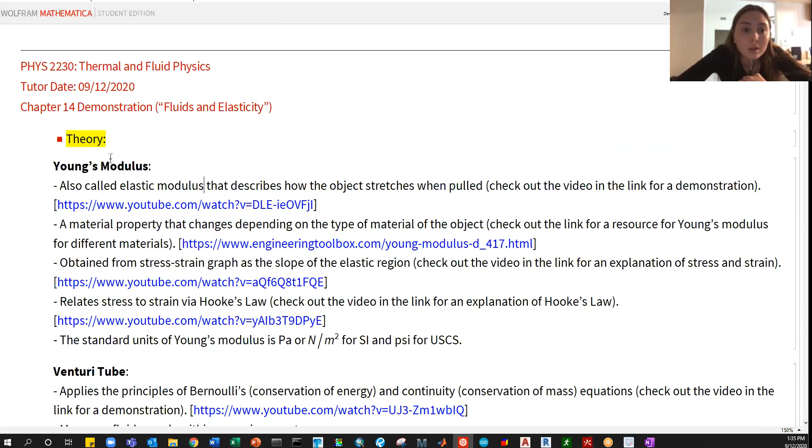But yeah, what I'm gonna try to do is with each chapter, since this is the first time, I'm gonna have some theory, and that's why I was asking which ones do you want to focus on, because there's so many, right? There's so many we can talk about, and then I think if we go over the homeworks and this example problem. Did I send you the example problem?

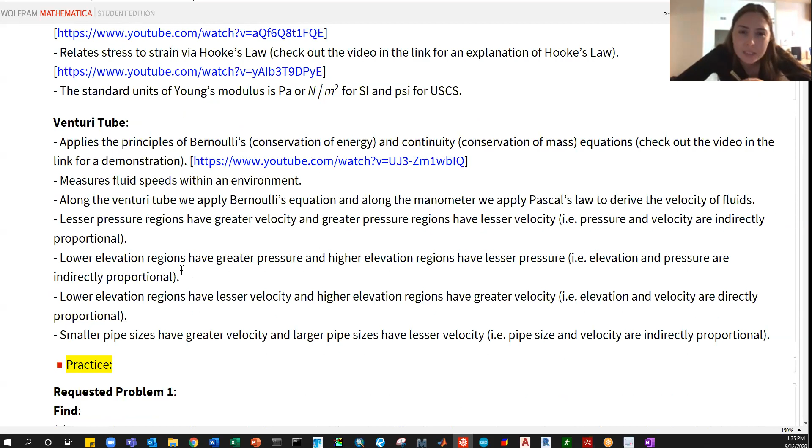Yeah, like three of them. Unless there's more, I can't remember. Hold on, it was example 14.6 something. Is it the one with the Y? Kind of like the Young's modulus? Stretching a wire, it was about stretching a wire.

Yeah, I think that's the first one. And then I'm sure the Venturi meter, like Venturi tubes, are going to be on the exam too. I was actually watching YouTube videos on Venturi meters last night, so I'm really familiar with it. But I actually have a question on that subject.

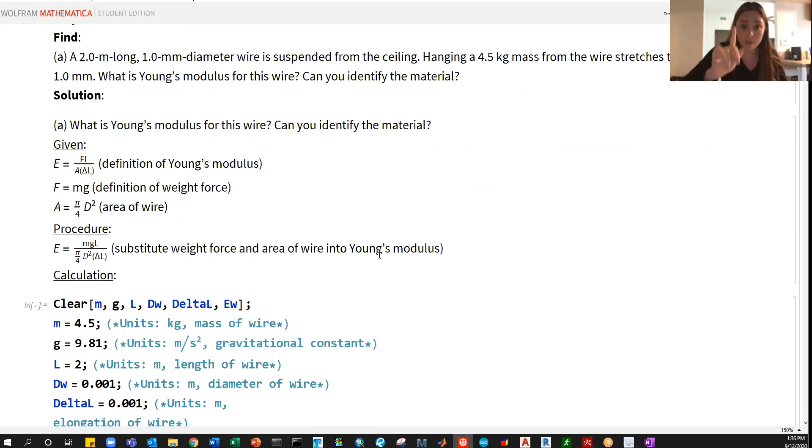So, have you heard of the chemistry tutor guy on YouTube? There's a lot of them. I do, in fact, keep track of a lot of them, like I have a library of YouTube videos. Okay, which one though? Who's the guy? It's like his name is that chemistry tutor guy. Oh, that's the name, okay.

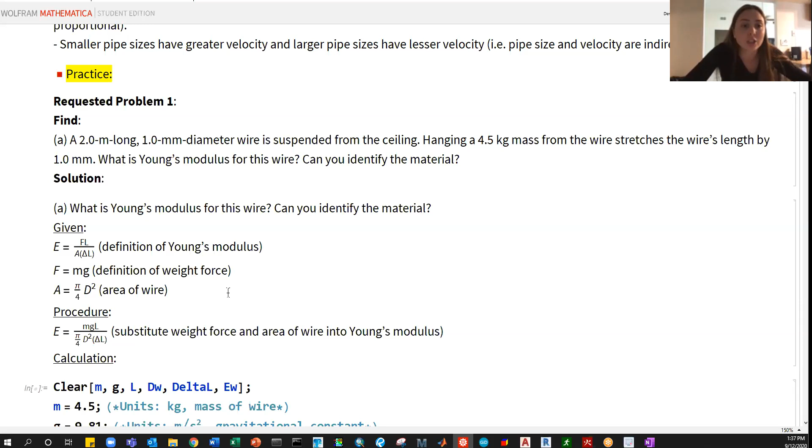Yeah, and so he was going over the Venturi tube, but I was confused on how he explained it. Watch here, I'll show you, I'm gonna share my screen. Okay, go ahead, let me stop this first. Go ahead, all right, one second.

Oh, I saw this one. Yeah, but I wasn't gonna add this because it seemed like there's a lot to it and it's kind of boring. But anyways, what about it? I was understanding it up until, well, I mean, I guess I still understand it. It was just more of a curiosity question more than anything.

Okay, go ahead, let me make this bigger. So pretty much this problem—hold on, I'm gonna minimize this. Okay, so this problem gives a point A and a point B, right? Yeah, and it has two water levels, and the distance between the two water levels is 61.2 centimeters. Yeah, and then so we're using Bernoulli's equation.

Is that the reason why we're using it? See, like I don't know, when I'm looking at a problem, I don't know if I'm going to use Bernoulli's equation or just use the continuity equation. I don't know. I see what you're saying.

So this is like the whole concept of Venturi tubes or the Venturi effect. We'll probably go over it, but since we're talking about it now, this equation right here at the bottom is in fact Bernoulli's equation. This is the general one, and I think this is the energy one because there's also the head version. So what you do here is think about the height—like which one do you use? Either the A1V1 equals A2V2.

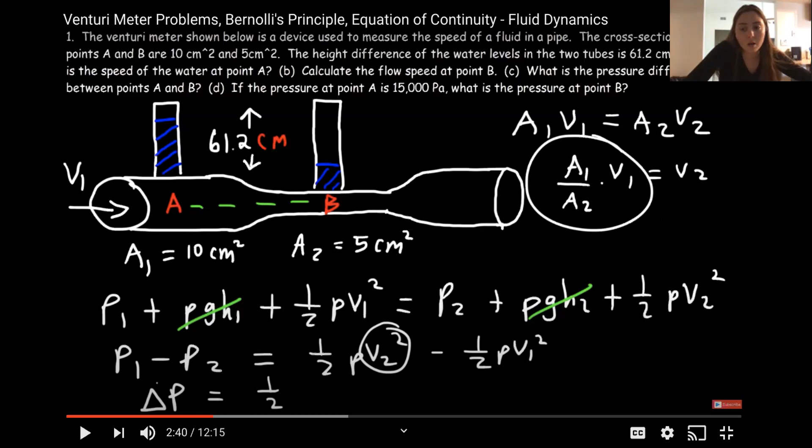And then where you have these water level heights up top, we technically call that a manometer. And you know the equation, this delta P at the bottom, P1 minus P2? So this P1 minus P2, every time you see this difference in pressure, that's Pascal's law. But this is where the top part, the manometer, the difference in heights, this is where you apply that, the difference in heights of the water column. That's the only time you apply that. So these differences in heights of the water correspond to pressure. Yeah, that's where you apply it.

Like how you combine these is because that's the height, that height right at 61.2. Because you're gonna have a height for P1 minus P2, you're gonna have a different height from H1 and H2, right? This H1 and H2 is not the same height for the column of water. Exactly, this H1 and H2 really is A and B. That's why I don't like how they're labeling it, it's actually A and B. That's why they cancel out, because they're at the same level.

So my real question, the main question I had was, okay, I understand all this that he wrote. He just rearranged it, crossed these out, crossed out the heights because they're the same, rewrote the equation to get delta P on one side and the rest of the equation on the other. But he said to get V2, he pretty much substituted this part. Do you see my mouse? Yeah, I see your mouse. Okay cool, he substituted this for V2.

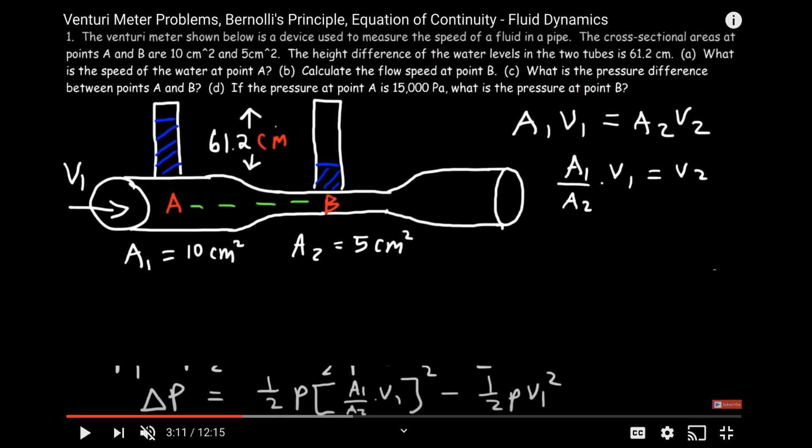Yeah, she did send problems this morning, but I haven't had a chance to look at them. Okay, but we can look at them after I look at this problem because I was already in the zone for this one. Once I finish this, we can go together. Do you have the solutions for those? I don't know, I think. Well, okay, you know what, just forget this, I'll do this on my own time. Let me check, yeah, this one. I think you got this one already. Let me see what she said.

Okay, she put solutions to homework 2. So I think that's the one, the two problems, right? It was from homework 2. Yes, were you able to look at those? Yeah, practice problems are uploaded to Blackboard. Okay, I got two of them. Are the other ones like, what's the other concepts? I guess we can talk about those if you're shaky or not blurry on those ones. Yeah, let's do homework 2 because I had no idea what I was doing with that one. And then after homework 2, we'll look at the practice problems. Okay, let's do that, yeah.

So here are the solutions. It sucks because she doesn't have the problem there, she just puts the answer, so I can't see what the original problem said. Okay, hold on, let me go back. There we go, okay, all right, okay.

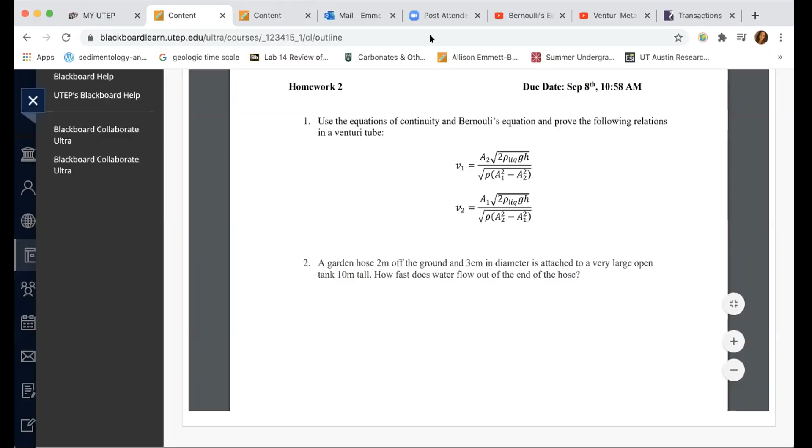Okay, okay, so I have it written down, number 1. So I'll stop my share now, and all right, let's do it. Let me see if this works. Okay, do you want to, okay. Oh shit, okay, what's up?

I was gonna say, do you want to see the answer to the solution first to make sure it's right? For the first one, are you sure? Yeah, or do you know for sure you got it right? I'm pretty sure it's right, because I had the same answer. The answer, he gives you the answer, right? It tells you the answer. So, here, so I guess for these ones, you know how, I think this is in the lecture note, right?

I think so, okay. I honestly haven't looked at it. I've been doing homework for like 5 other classes. I haven't even looked at this class.

Oh shoot, 5? Oh my god, that's kind of like high school. Yeah, honestly this is the class I care the least about. But it's good to be honest. I'm gonna say this class—the one thing that will make it easy is just doing more problems. That's what it is with this type of class, you can't just breeze through it and say oh yeah I understand it the day before the final. It's not conceptual, it's very quantitative.

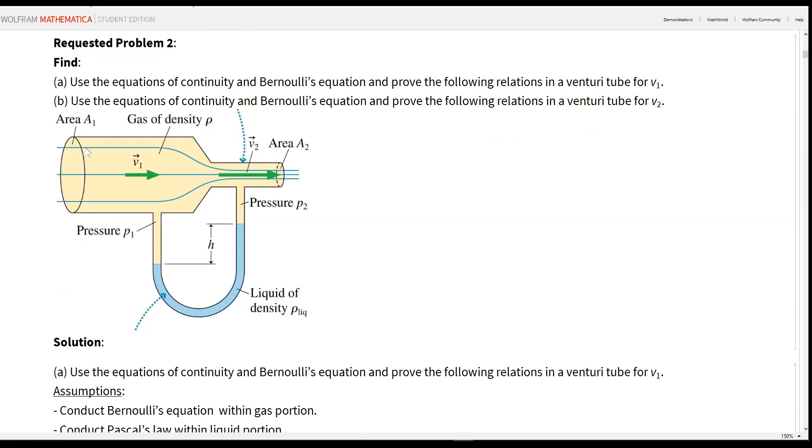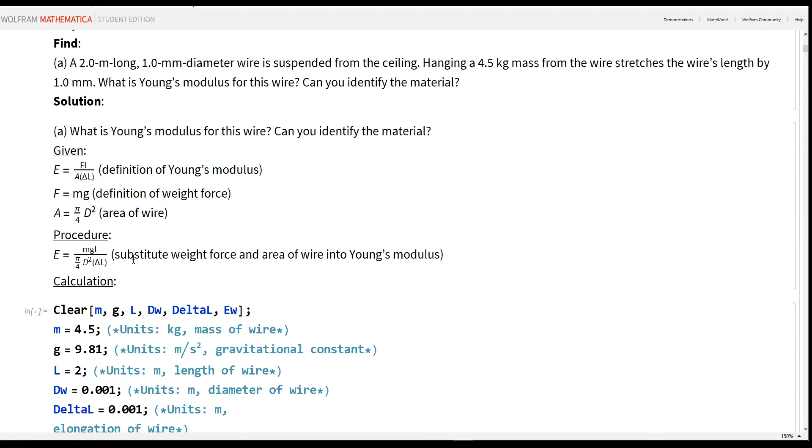Wait, so is this number 2, the homework? It's not, this is number 1, but then I made this number 2. Like number 1 I guess is the Young's modulus one. The 14.13 — oh, we're doing number 2, not number 1. I thought we were doing number 1. We're doing number 1, but I made this number 2 for what I have here. It's still number 1, whatever.

Okay so, it's kind of like with the video that you showed. You have this Venturi tube, right? And then here is kind of like the manometer. I don't know what you guys call it, but this is the manometer, and then this is technically the Venturi tube, because this is not really a tube.

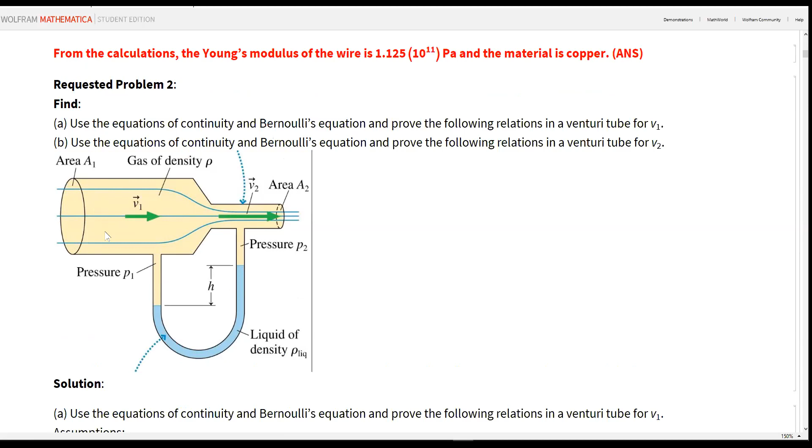Anyways, right. So what I laid out here are kind of like assumptions that maybe you can read through and build on, and then ask me if something is confusing. But mainly, when you're looking at this, you want to make these assumptions, like know how you're gonna attack it — for example, what's in your arsenal, what do you have? You have the Bernoulli's equation, right?

And then you have this Pascal's law, which is kind of like this guy — this is just the difference in pressure. But anyways, this Bernoulli's equation for a Venturi tube — this is not always the case for everything, but for the Venturi tube, you apply the Bernoulli in this portion, the Venturi tube, or where the gas is. And then the difference in pressure is where this manometer is, the liquid — or there's some gas, but there's some liquid in there where the liquid is. And that's how you're going to attack it conceptually before you do the equations.

And then the other assumption you should make, which will make your life easier, is that one thing we talked about: within here, when you're applying Bernoulli's equation within the tube, since they have the same height everywhere here, the y1 or h, whatever, are going to be the same, so they're going to cancel out. But here you're going to have a difference in height, obviously, and that's why you have a difference in pressure.

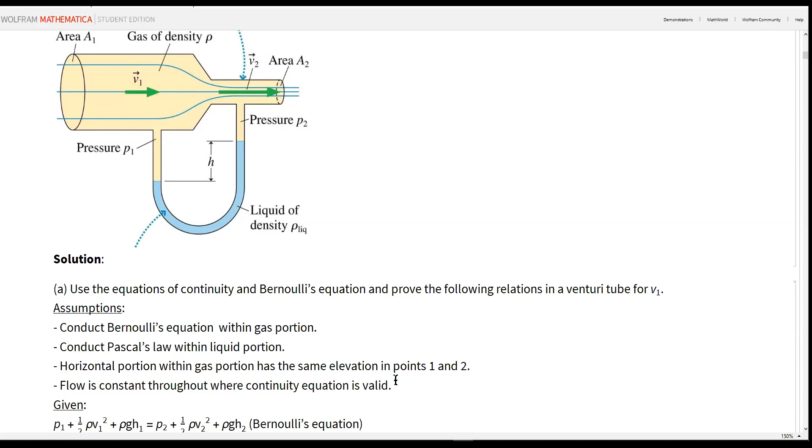But that's awesome. With number 2, how would I prove the following relations? Okay, so with that—or not number 2, I'm sorry, Homework 2, number 1. This problem, yeah.

Okay, so what you would do—let's jump to that—the very first thing is the continuity equation, right? You have this continuity equation. So you have to prove two things, and obviously it's going to involve velocity. So it's given that one of these has to be isolated. You need to have either V2 or V1 and everything else on the other side. But that's probably like trial and error with deriving these equations. In your thought process, you're probably thinking, okay, I'm gonna use this. Somehow I'm given these A1s and A2s.

So let's do this, that's what happens. The second thing here is, okay, let's apply the Bernoulli equation, and so you get this continuity equation and plug it in here. Yeah, that's what we were doing in the video. Right, exactly the same thing. And then it's pretty much just algebra—you just move things around. There's nothing really, there's no assumptions here.

And then the one thing with this is, remember the difference in pressure? Like it's delta P. You gotta be wary about how you're gonna manipulate things—put these two together, group them so that you can actually get this guy, because you need this guy somewhere. So after you group that, you have your givens, manipulate your Bernoulli equation according to your givens, and then it's pretty much just playing with variables. And then in the end, what is that? Wait, hold on, let me read it.

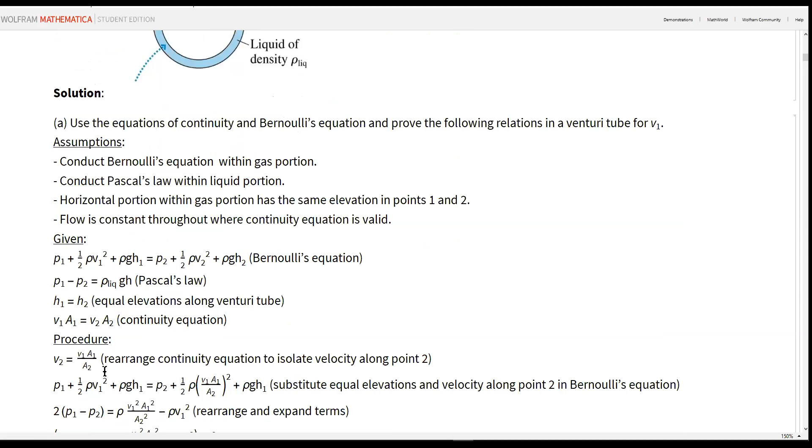I wanted to say this, this is kind of an aside, but you know how this rho is just rho, right? In the end we have like 2 rhos - this is the end goal, you have rho liquid and rho regular. This rho here is the gas. This is the yellow part, the rho here, and that's the liquid, right?

So what rho is it? Let me ask you this - what rho is it, the liquid or the regular one? It's the regular one for the Bernoulli equation.

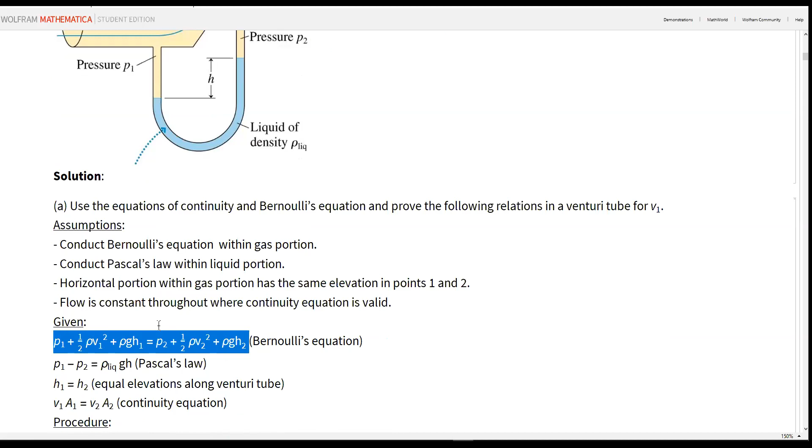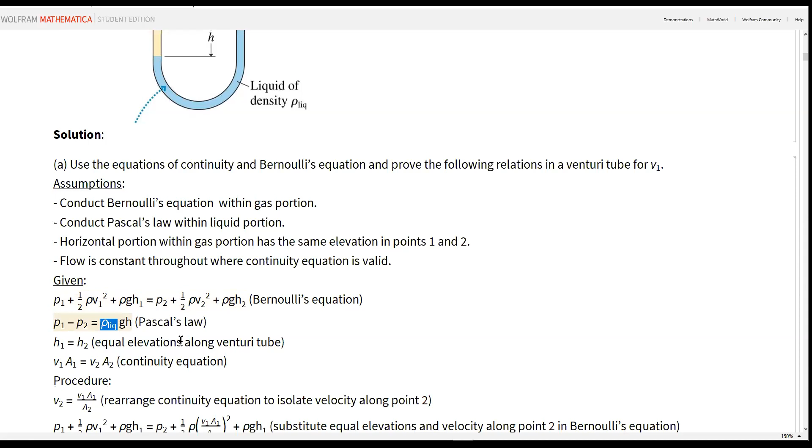Okay, so the liquid comes later then. The liquid is where you're applying that, which is this difference. But where do we apply that in the equation we were just doing, the rho or the liquid? I thought you said it was the regular. Yeah, it is rho regular, that's why there's a difference there.

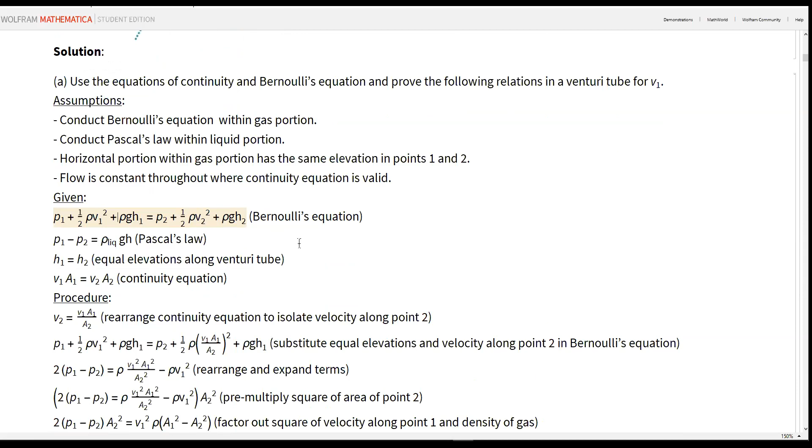And then what you want to do is, because this... okay, go ahead, I'm asking where we were - go back to the steps. Right here, these rhos here, which ones are for liquid and which ones are for gas? Okay, so the whole thing we're using here, because we're still in the Bernoulli one, is... we're not using the liquid's one, not yet. Okay, that was my only question. Okay, that's fine, good.

Okay, and then we factored out a V1 squared and a rho. And then what about this part?

Wait, so then... yeah, I get it now. And then for here, see, I don't know what we did there. Here? Yeah, no, I don't know how you went from this last step to where the square roots are now.

Okay, yeah. So after doing this part, you know how you have this difference in pressure? This is the only part that I changed. What I did here, I substituted Pascal's law, or the difference in pressure. So this is where the liquid comes in, pretty much.

Okay, hold on, let me write down... okay good, I'm gonna write down Pascal's law. Okay.

What do you guys call it, by the way? Pascal's law? Does your professor call it Pascal's law, or just difference in pressure? Difference in pressure. I'm sure she's mentioned Pascal's law here and there. Yeah, usually I remember it as difference in pressure. That's what I remember it as. Yeah, the formal way, because Pascal did a lot of things, but it's a difference in pressure. I think we'll stick with that one.

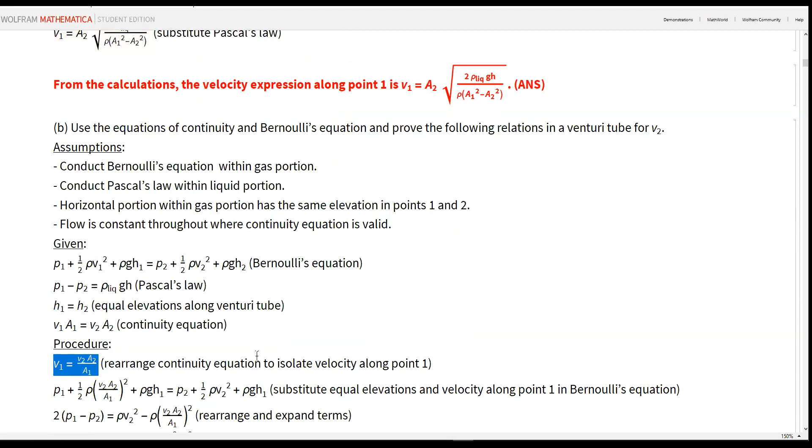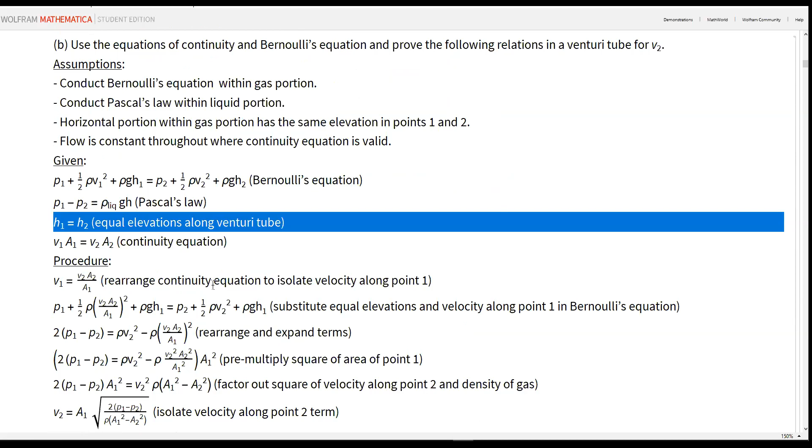Okay, but does it make sense though for the other one? Yeah, it makes sense. Okay, I get it now, cool, alright.

For these ones, I don't know if your professor's going to give you another one, because like this one there's no numbers at all. I know there's some problem in the textbook that does a lot of these, but I don't think it's like Bernoulli. But maybe just do some of those, and the more you do it... Yeah, I'll even practice that.

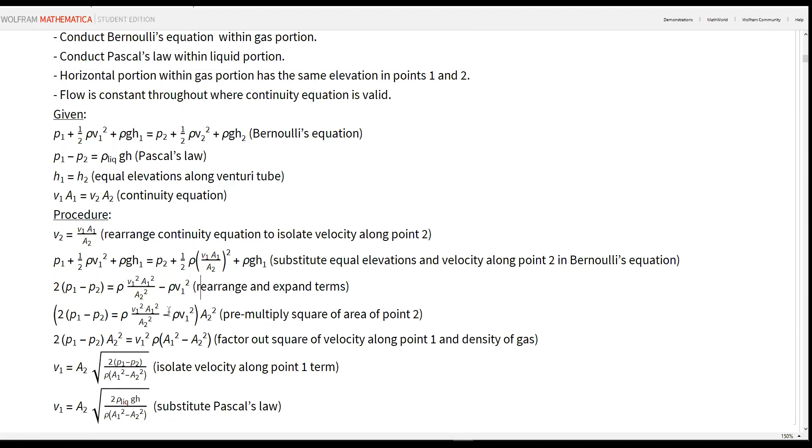Even this one, in terms of speed, isn't the exam going to be take-home, right? It's going to be online, on Monday, and she's going to have everyone have their webcams on. Oh, Big Brother, that sucks.

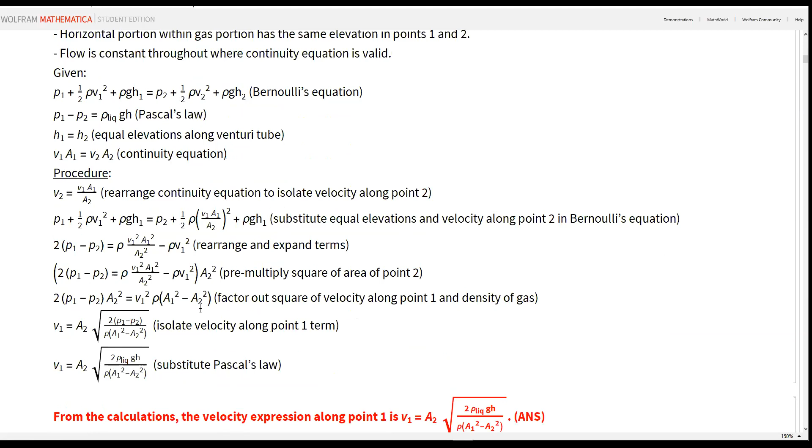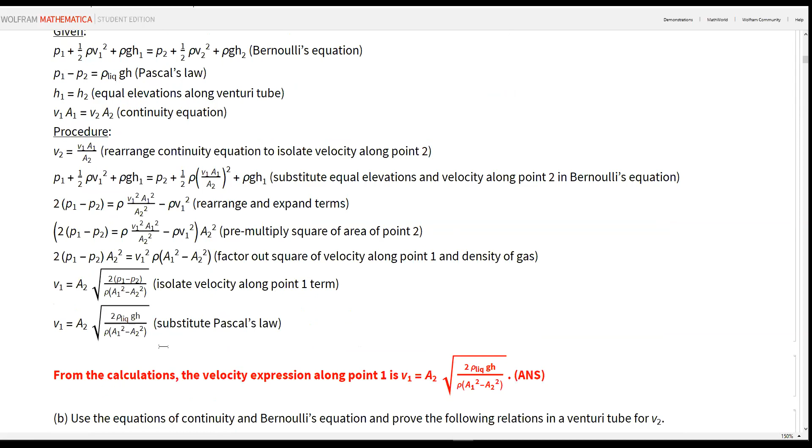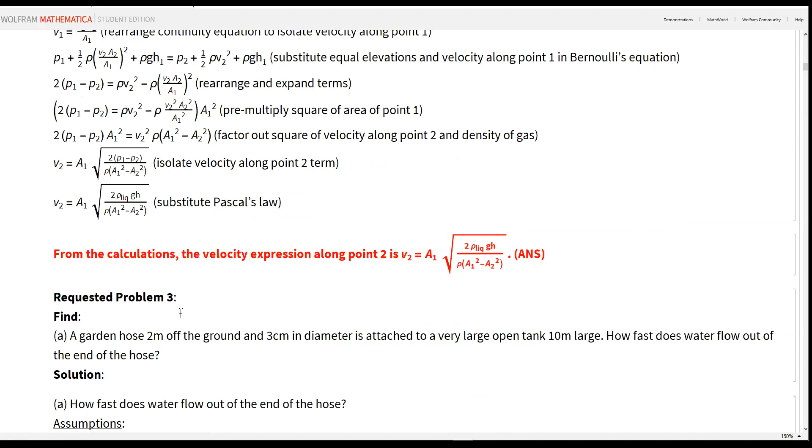No, my professors usually don't like to do that because it's pressure for one, but it's kind of... I mean, you might as well just use it as an open book exam anyway. What's the point? Especially for people who aren't majoring in this, what's the point of making it so hard? Yeah, if this isn't your background, it is kind of hard.

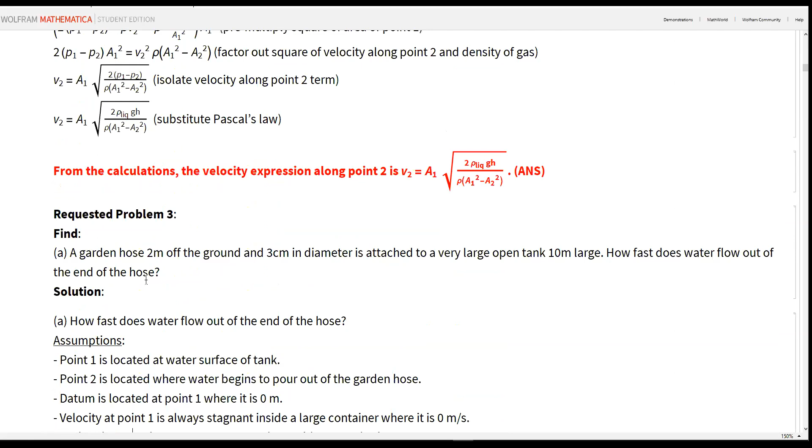Yeah, it's not my background at all. But luckily I'm not completely stupid, so I can do algebra if I really, really practice it. Yeah, I just have to practice. I think math isn't really acquired, I think that's what people think, but I think math is just hard if you don't practice it. Exactly, yeah, it's like working out, it's like a muscle that you have to practice.

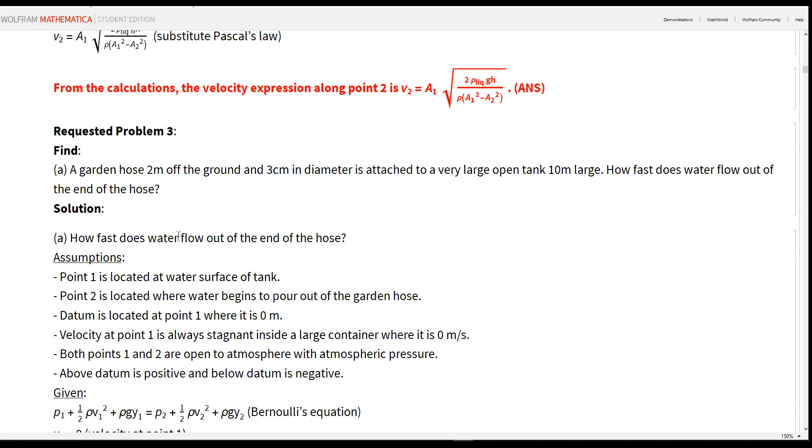Okay, so let's go to the next problem now. Did you do this one already? Number 3? Yeah, I mean I copied it from Chegg, but I didn't know what I was doing. Okay, but I'm down to do it because I want to learn it. Okay, alright then.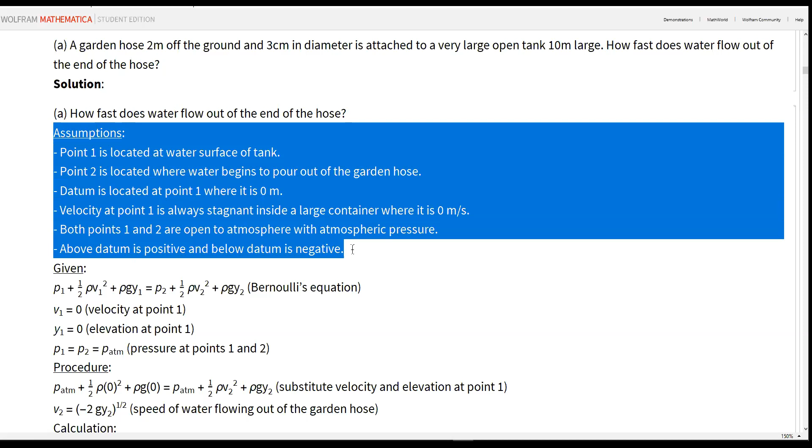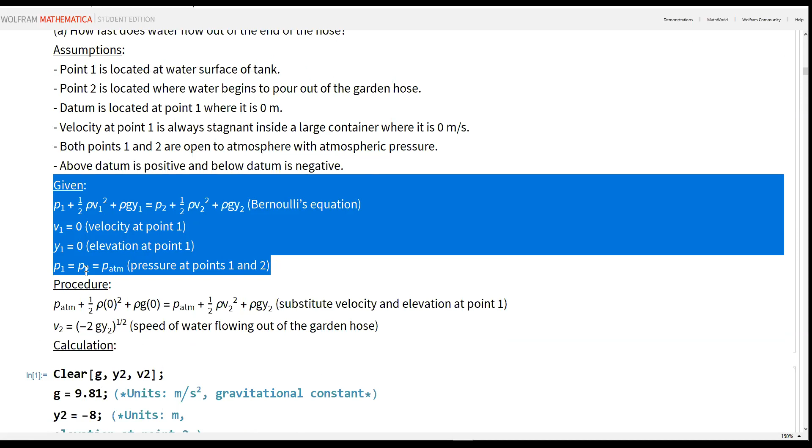Did you want to ask what parts? Did you try to do it by yourself? I mean, I read it on Chegg and tried understanding it, but I didn't really understand it. I don't know where I wrote it out, honestly I think I ripped it out of my notebook because after I turned it in, I was like, whatever. But I probably shouldn't have done that.

We'll just go over it, it's not that bad. Okay, let's just go over it. Let me go back to the problem and read it so I know what I'm looking at. One second, I technically just copied the problem here. Oh, you did, okay cool. Yeah, I think I made this... a garden hose 2 meters off the ground, yeah that was the wrong word, so there we go.

Hold on, okay so problem 2. This one isn't bad, but I think you probably have to draw it out. Yeah, for sure, hold on, let me write it down. Garden hose... let me see if I can do something similar to that... meters off the ground.

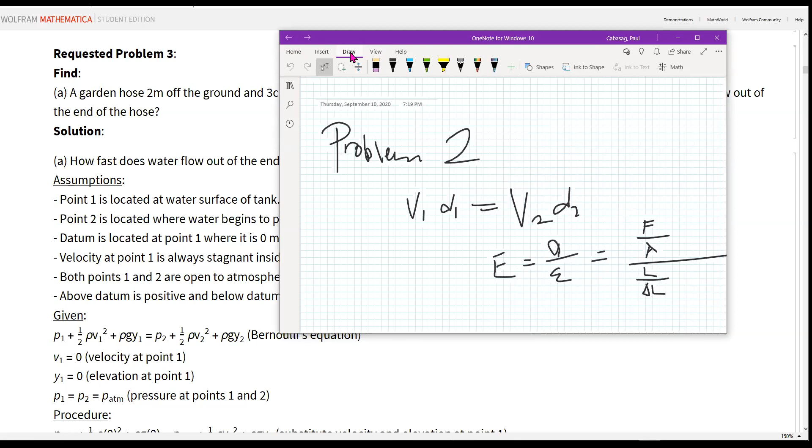Oh sorry, could you lower it so I could finish writing the problem? Here we go, thanks, thank you. Okay.

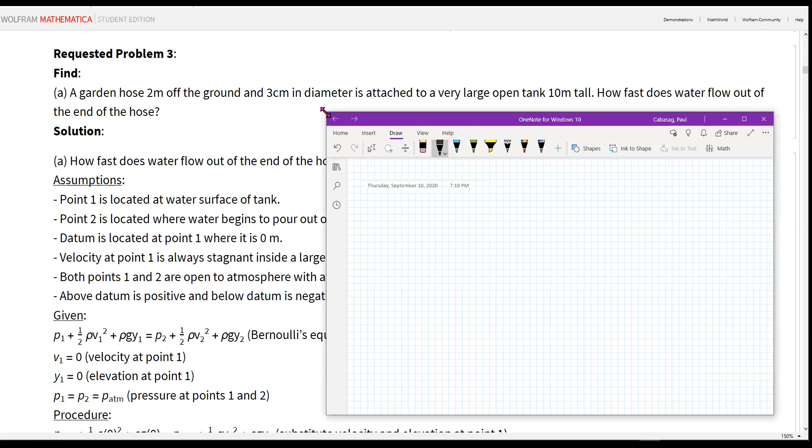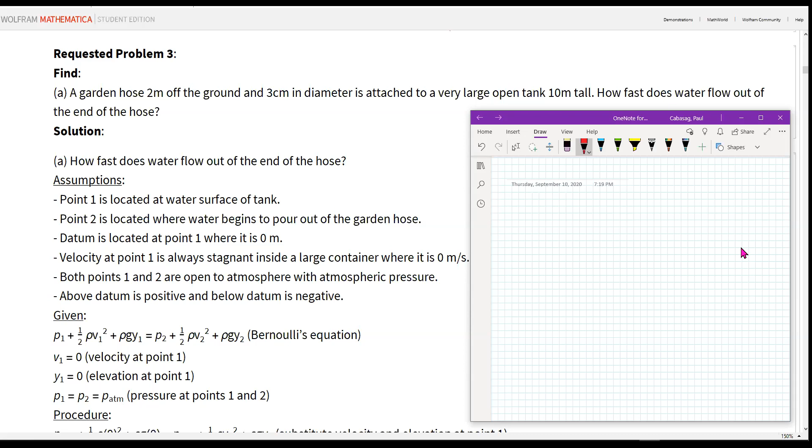Does water flow out of the end of the hose. Okay. All right. Ready? Cool.

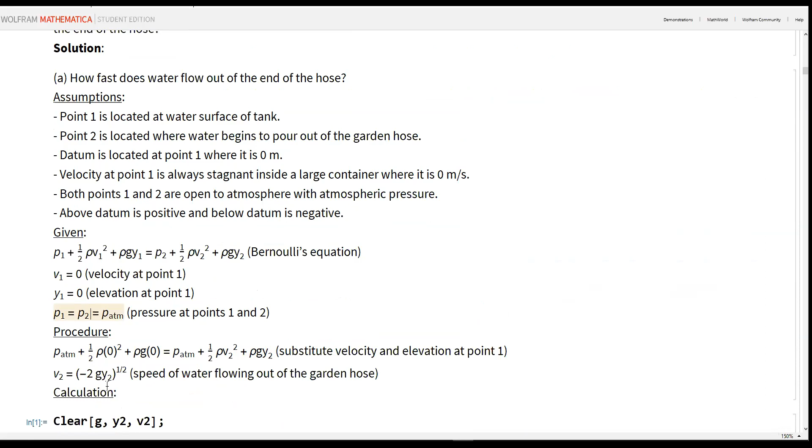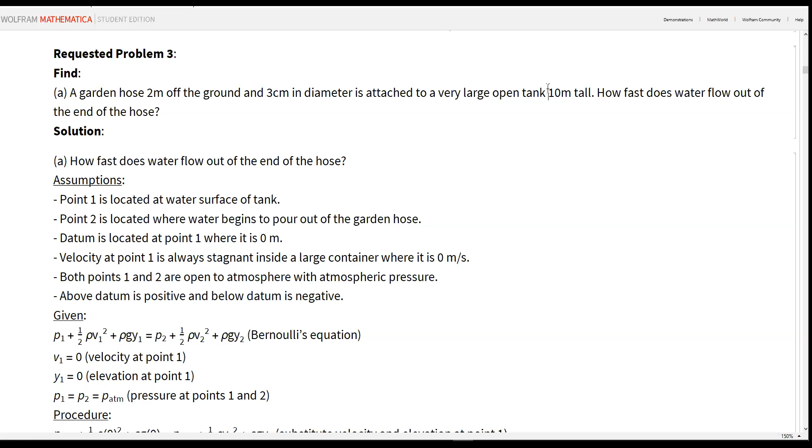So I'm assuming we're gonna need the volume flow, which is just A1 times V1, right? That's the volume flow rate. So like for this one, it technically says 10 meters, right? I think this is just a distractor. You technically need it for this one because it's asking how fast.

So I guess for these ones, what I would say is like, are you using Bernoulli, or would you be using the continuity equation? Right, yeah, that's my main thing.

The way I would do it is I'd always default for 99% of the time to Bernoulli - that's my first thing. I'd go to that, and if it's not that, the one thing that would hint you should use continuity is if it gives you A1 and A2, or won't give you A1 and A2 but will give you the diameter of two things. This is only giving you one diameter.

So you use continuity when you have two diameters. This is what I was hypothesizing - that you use continuity when you're only given 3 out of the 4 things in the equation, like 2 areas and a velocity, or 2 velocities and an area.

It makes sense - if pressure is included, then that's when you'd use Bernoulli's, right? Yeah, pressure, velocity, exactly. Because like, the thing is you're thinking, oh, there's no pressure in this one, right? Yeah, it doesn't give you pressure, but that's the thing.

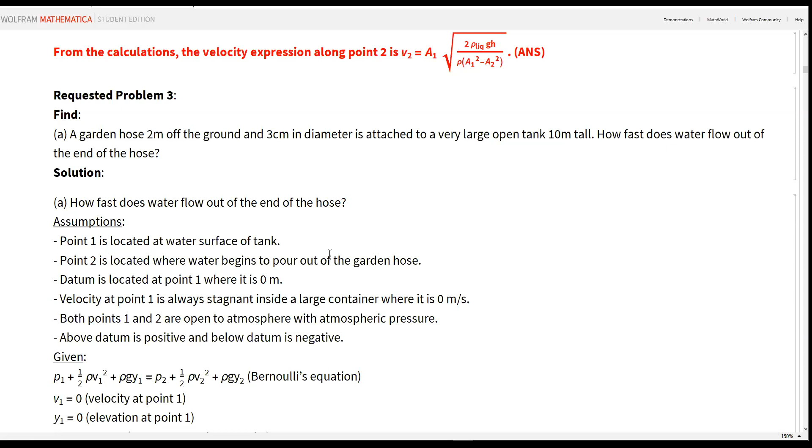Should we look at what my teacher put? Do you want to share that? I can probably just explain it. Okay, hold on, let me find it and share my screen. Okay, let's look at this.

I'm going to solve this equation in terms of V1. You will need to write V2 in terms of V1 as well. What is the solution for that? I see what you're saying - okay, so that is what they did. Okay, I get that.

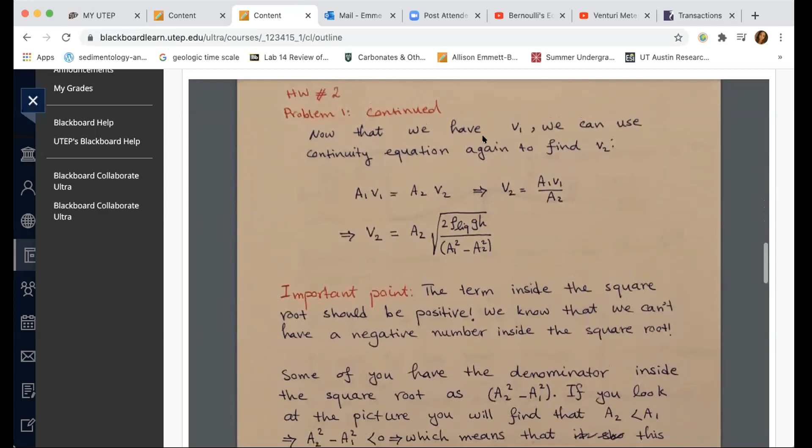Now replace V2 in Bernoulli's equation. Got that? This is the first one - oh yeah, it is number 1. Which makes sense, that's why I was able to understand it, because we did do that one already. No, it's still a problem. This looks really good though. I was going to draw that, but good thing I don't have to anymore.

So what is that, Z1? I think so, yeah, that's height. You could use either Z, H, or Y - I like H better. Okay, she used Z there, but then now she's using H. I hate when they switch notation like that, that's annoying.

A hose of diameter 3 centimeters - okay, V2 that way. Isn't it 2 centimeters off the ground? Wait, didn't it say 2 meters off the ground? Let me see that again - oh, she has it holding up right here, that's 2 meters. Oh yeah, that's 2 meters, okay I get it now. She was being extra with that illustration, confuses the heck out of you though.

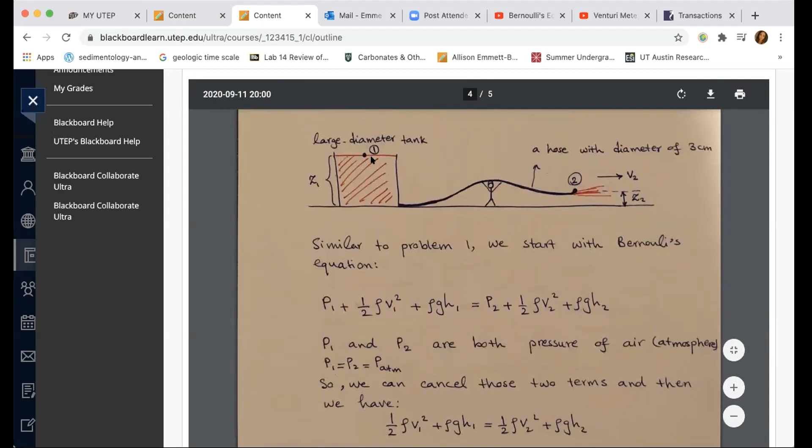It's like, oh now are there curves we have to calculate? But no, it's pretty much just the start point at 1 and the end point, and that's it - just the difference between the two. Anything in between doesn't really matter.

Similar to problem 1, we start with Bernoulli's equation. P1 and P2 are both pressure of atmosphere, so P1 equals P2. This is one of the assumptions. So they're both under the same pressure? Yeah, this is always the assumption every single time, it always comes up I guess. So do you get this one?

Not really, to be honest. So with pressures, the one thing you can always assume - that's why it's good to create a pictogram - you can imagine it because physically you have this large tank, and you know how it says 'open' in the problem? That's the key word, because sometimes it says closed, sometimes open. So when it says open, that means pressure is always atmospheric, ATM, every time. It doesn't matter what the container is - a bucket, a tank - if it says open, it means it's ATM, P atmosphere, at that point.

And then like at point 2, it's a hose, right? It's a garden hose. So when is a hose ever plugged? It's always gonna spray something.

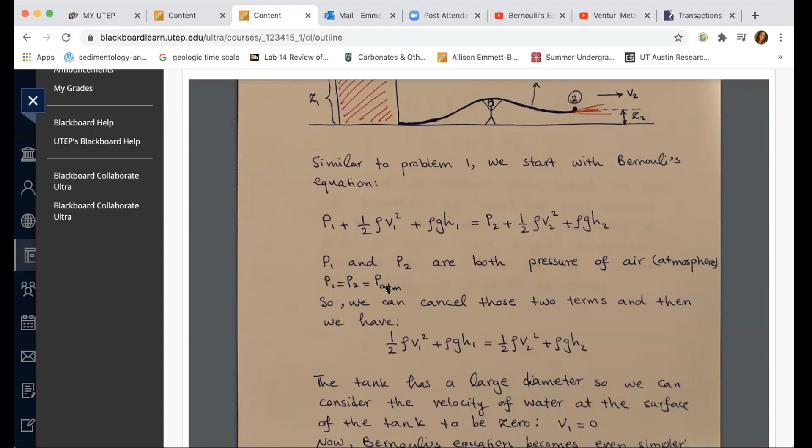So we can cancel those two terms. That's the reason why you want to assume those two things are ATM. You always want to assume that, because if you do, then they're going to cancel. It's like because there's too many variables - you won't be able to solve for anything. It's usually the case though.

For that one, to go over it - you know how this one is both open, right? Yes. So sometimes one isn't open, one is closed, and the other is open. Every time it's closed, there's always going to be pressure. Something has to be - if it's confined, they'll always give you a pressure. And then you have to find the other one.

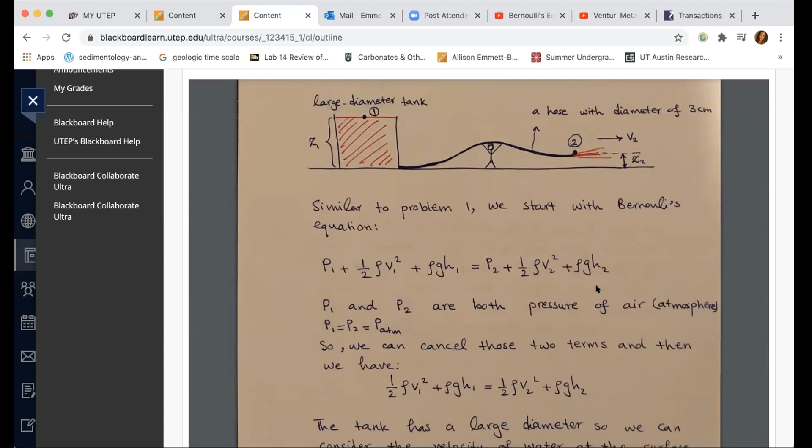I see, okay, that makes sense. That would have just flown over my head, honestly, if you wouldn't have explained that. So thank you. Okay, so cancel that out of the equation. Okay, cancel that out. I got that. So pretty much P1 and P2 are gone.

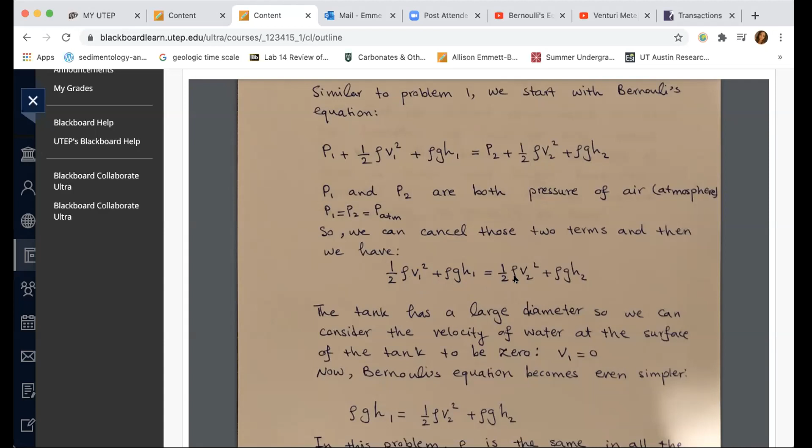So we're left with: 1/2 rho V1 squared plus rho G H1 equals 1/2 rho V2 squared plus rho G H2. Okay, the tank has a large diameter, so we can consider the velocity of water at the surface of the tank.

All right, stop. Wait, what? I don't get that. Yeah okay. So this is the second - not everyone always gets these assumptions, we have to go over it. Because the assumptions will make your life easier, or maybe confuse the heck out of you. And I think that's what really messes me up.

But like I said, we just have to go over it. It's one of those things, once you know it, you'll never forget. But anyways, for this one, every time - that's why they tell you it's a very large tank, right? They tell you that. Why does it matter? You probably wonder why it matters.

What does that mean? The larger the area, I think it's slower velocity. Yep, you got it. Yeah, all right, cool. So what does that mean in this case? Applying that - you pretty much got it, but you have to apply it here then.

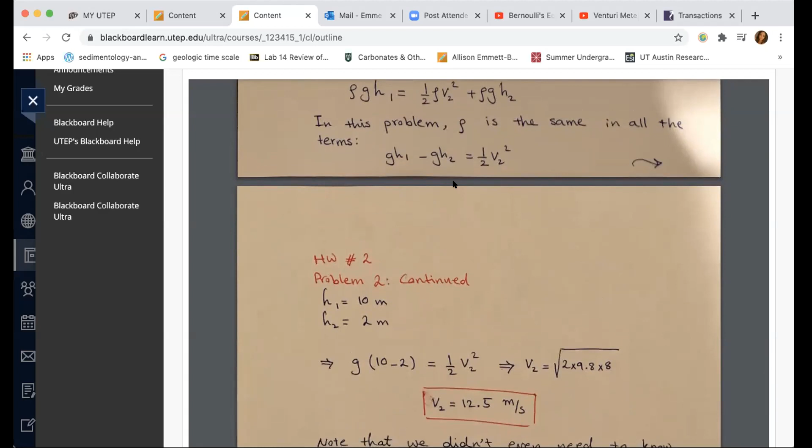Bueno, yeah, I think that's what I got too. Can we go over the algebra of that part? Which one? Of this. Oh okay, yeah she didn't write that. What I would do, no yeah, is she just gave the answer with the square root. Yeah, I don't know, they usually do this, which sucks and it's sometimes good.

But once you have this one half V2 squared, multiply by 2, right? Yeah, like so if you write that, you put it on the left hand side, and then after that, so that's where you have this 2 right here. That's like where you have this 2. Let me see.

Wait, hold on, oh I have to approve something. Would you like to control this computer using accessibility features? Let me see if I can, because I don't have my mouse. Try to approve that one. Let me see, to approve. How do I approve it? Let me see, allow the apps. Did it work? Do you see my mouse? No, see my mouse? Try it again, okay, what about now? I think you should be able to. No, okay, whatever, it doesn't matter.

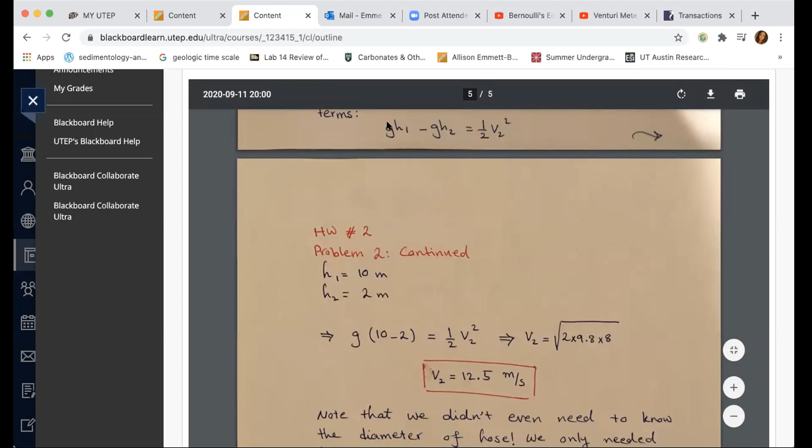I'll just say it. So like this 2, this one half, you move it here on the left hand side, and obviously you're left with V2 squared on the right hand side, right? V2 squared, and then so that's why you have this 2 here with times 9.8, which is like the G. Oh I see it, yeah, in the square root. Yeah, and then times 8, 8 is 10 minus 2, and then the square root is after you get V2 squared, you just square root everything. Wait, but why is 9.8 only written once if we have 2 G's? Do we cancel them, 2 G's? Oh, I see what you're saying.

This pretty much factored it. Like G, it's pretty much the same. So you just factor it out. And so where did it go? Oh, it came out. Oh, I see it now.

Yeah, you could do it either way. If you want to do it like GH1 minus GH2, and then times those, like 2GH1 minus 2GH2, and then square root that, it's the same exact thing. Wait, hold on. Okay, so GH1, because I'm literally not going to understand it if I don't write it down.

Exactly, yeah, that's the thing with this class, it's not very conceptual, it's all quantitative. Yeah for sure. Okay, so we're going to multiply by 2 on that side, cancel out the 2, so we got a 2 here. So now we're left with 2GH1 minus 2GH2 equals V2 squared. Okay.

So, wait. Makes sense. No wait, because I see how the H's get subtracted, right? Because it's 10 minus 2, which is 8. Yep. But I still see 2 G's.

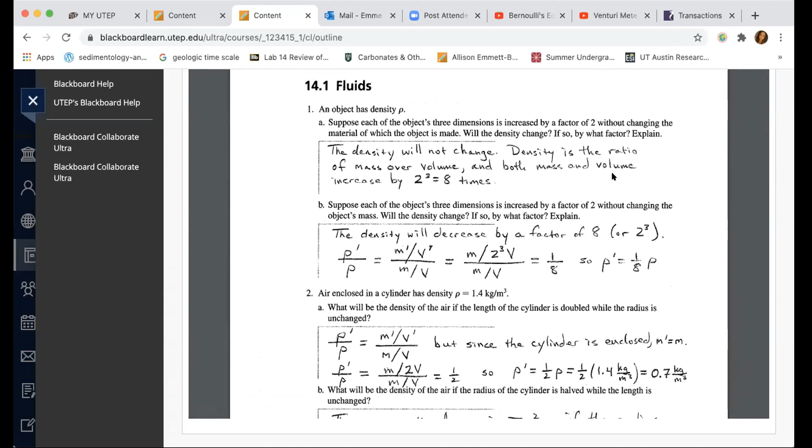Okay, so these are like, she's doing concepts. Okay, so she is doing concepts. Ooh, see, I hate the fact - I mean a lot of fluid dynamics, a lot of these are just, what's the other ones, like there's 1A, 1B. Okay, 3, it's still a concept, really.

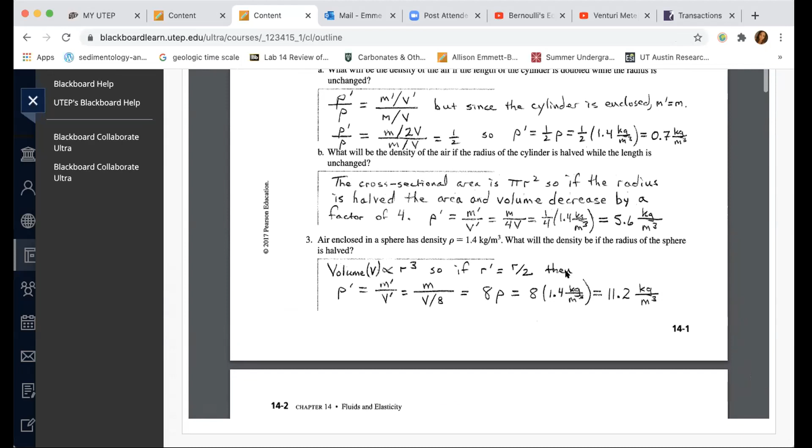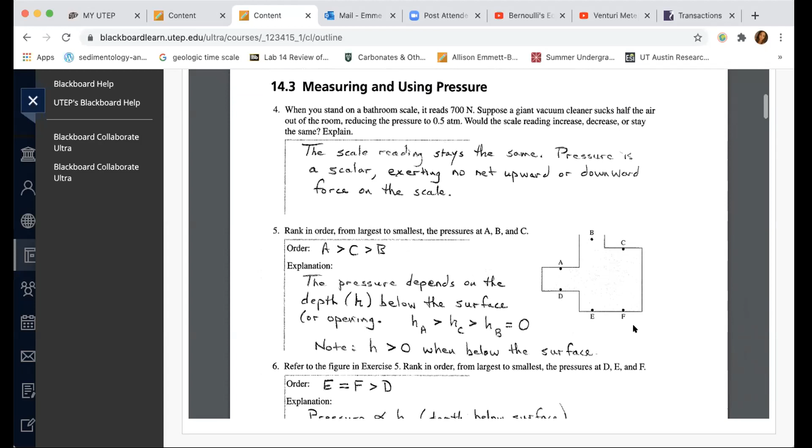And this one, oh man, concept again. Yeah, I hate professors that do a lot of concepts, because this class is not meant to be a concept class. It's really just knowing the equation and when to apply it. Because if you make it conceptual, it makes it super hard.

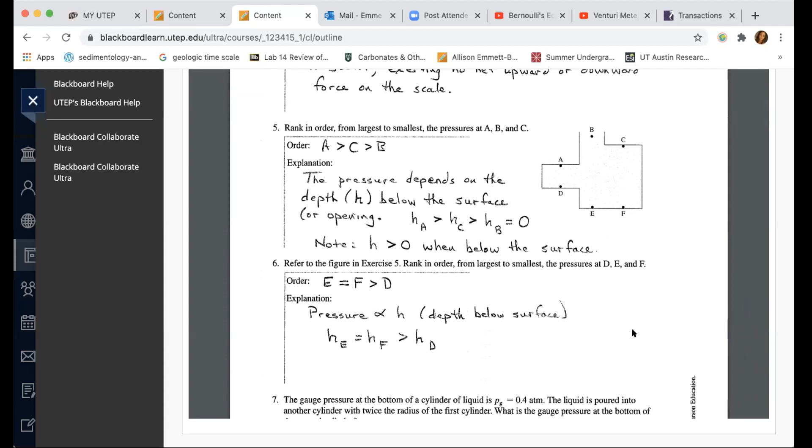Okay, so that one, yeah, it's still a concept. Like, or maybe is it all concepts? That's crazy. So, it's all - it is all concepts. What the?

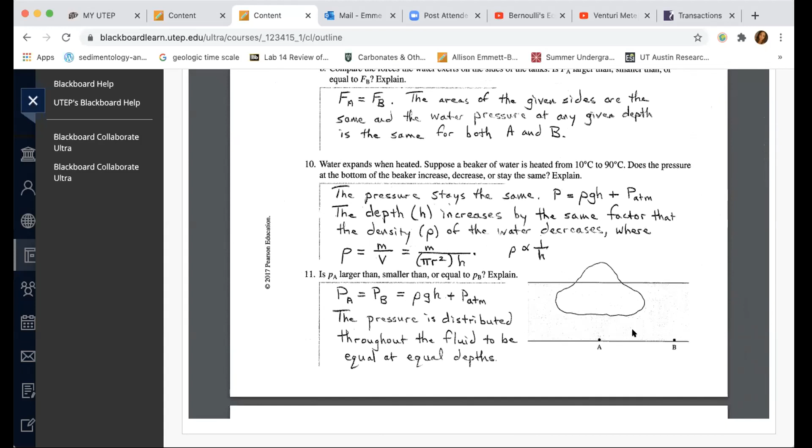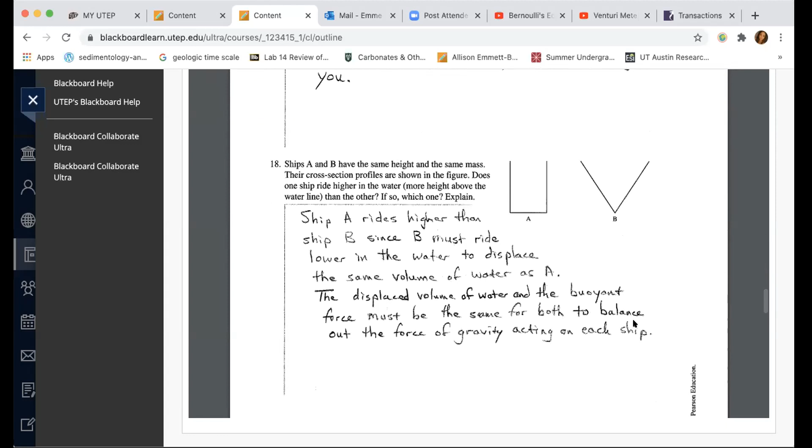Damn, you know, I did some of the problems. It kind of looks like it's very similar, some of these. Okay, let me see, okay, there's more. Oh, so this is the one you're talking about.

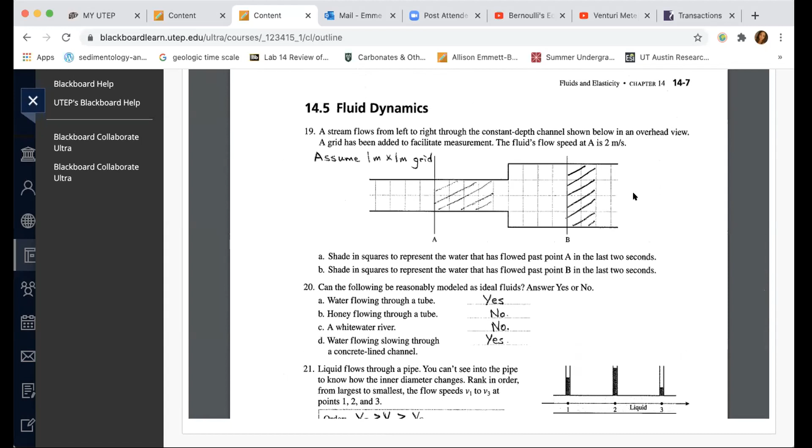Shade in squares, what the? Okay, this one looks similar to the problem I just did. Elasticity, okay, another concept. Elasticity as well - which one are you better with, the fluids or elasticity?

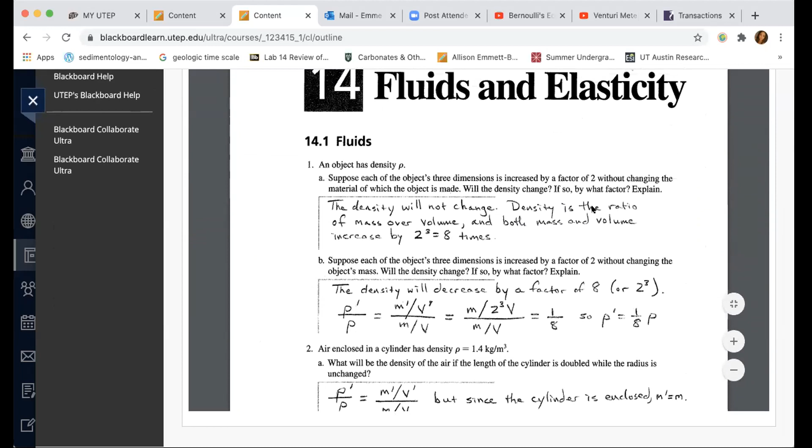Fluids. Okay, it's not that bad, they're pretty much the same thing, just different mediums. Okay, we'll go over it. Like which one though? There's a lot of things to go over. Yeah, oh God, I guess the first one. Okay, so the first one isn't that bad.

So you know how this is actually one of the problems - try look at the one that I sent you, let me look at this and see where it's very similar. Okay, density will not change, and both mass and volume increase by 8 times. It's actually the first one, 1A here is 1CQ. If you look at the problems that I sent, it's like 1CQ.

Oh God, I don't get that. Wait, okay. Suppose each of the - sorry, I'm just reading the first one, I'm trying to conceptualize. Suppose each of the object's 3 dimensions is increased by a factor of 2 without changing the material of which the object is made. Will the density change?

No. Okay, yeah, that makes sense that it wouldn't change because you're not changing the material. Yeah, you know how this is her solutions - are these her solutions? Yes. Okay, I really don't like her solutions, to be honest.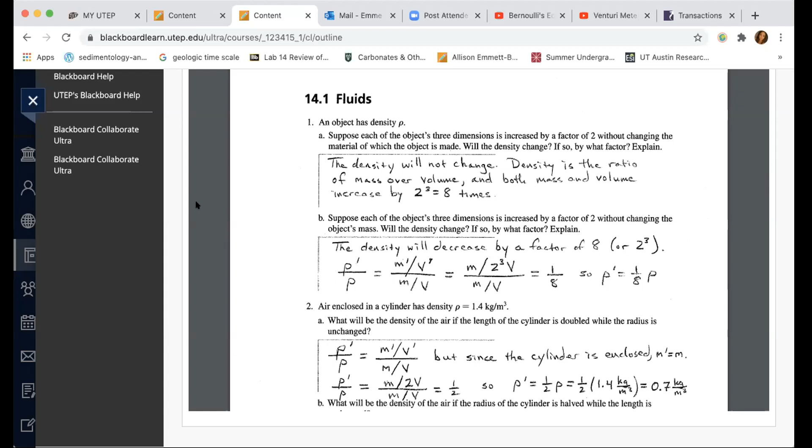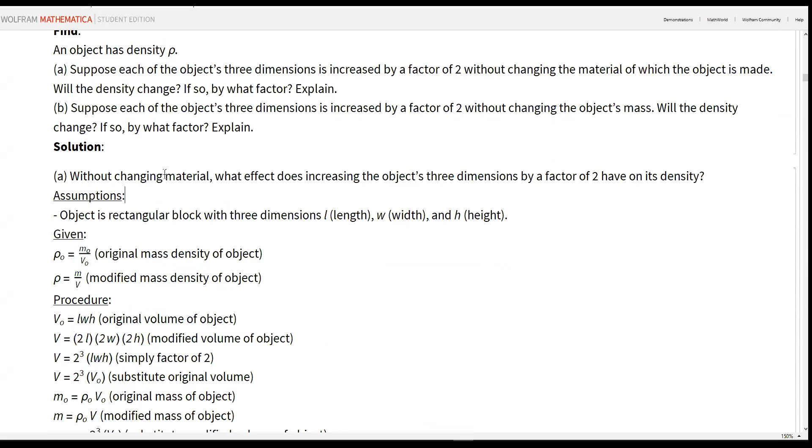Can I share my screen? I want to show you how it should be done. Yeah, for sure, because everyone has their own way of doing it, but let me know when you see it. Okay, so this - you see it?

Yes. Okay, so I think that exact problem is problem 1CQ - it's this problem, right? Let me try to see. Yeah, it's pretty much the same. Exactly. Okay, yeah, so so the way I would do it - how long is your exam?

Is it timed? Ooh, yeah, it is timed. Okay, it's the length of the class, which is an hour and a half. That's not long, because if you do it the way I do it, you know what I would suggest?

It's probably challenging, but I already gave it to you, so these are all the problems pretty much. If we go over what she gave you guys, it's probably more than half of it is what we already solved. It's pretty much in the textbook is what I'm saying. So what would make it easy, if she keeps the same pattern, is if you do the problems ahead of time, then you have it with me. Yeah, because it doesn't matter if she's watching you guys.

Like, I can just have it in front of me and she wouldn't see me. Or she would see me, but she wouldn't see the paper. Yeah, it's pretty much like how prepared are you for it.

I don't like those tests, but it doesn't matter. That's what I would suggest, because more than half the problems are like in the textbook anyway. But for this one, when it's asking what is this factor, you just do it the best way instead of just giving a one sentence answer.

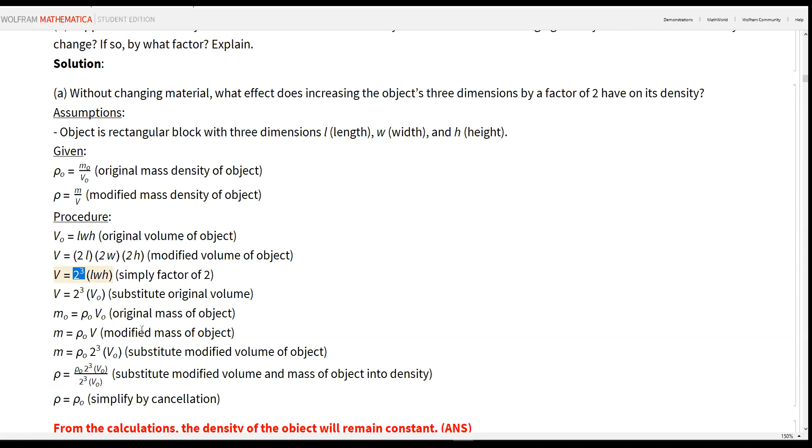So this first one is our original mass, this is for part 1A. And then what I have here is the modified mass - you pretty much updated it, and the update is this thing right here. Oh, so this is where you're getting this 2 cubed from - 2 to the power of 3.

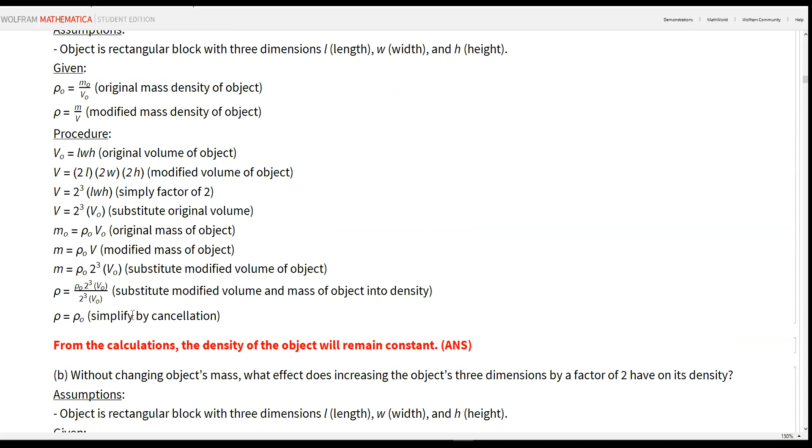But why is 2 to the third on the top of the fraction on B? It's only on the bottom. But it's on the top. Which 2/3? 2 to the power of 3 times volume over... for 1A or 1B? Over volume. 1B. In mine's or in hers? Okay, in B, we're on 1B. There's rho prime over rho equals M prime over V prime over M over V equals M over 2 to the power of 3 V over M over V.

So my question is about B, for 1B, on fluids and elasticity. Yeah, like there's no 2 to the thirds at the top, it's only at the bottom. It's right there, M right here.

Over, look, I'm gonna share my screen. I don't know what he's looking at. Let me see. Share it. Okay, I'm sharing it. That's funny. Wait, where is it? Okay, hold on, where'd it go? I thought you were looking at what I was looking at. Okay, look right here. Oh, that's what you're talking about.

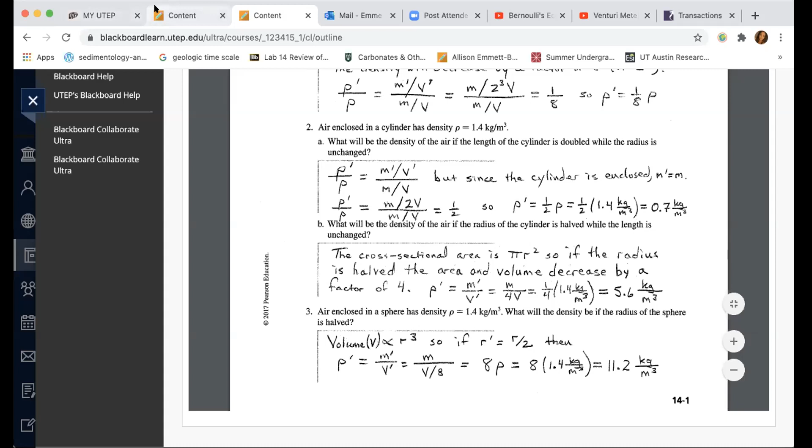I can't find it. Okay.

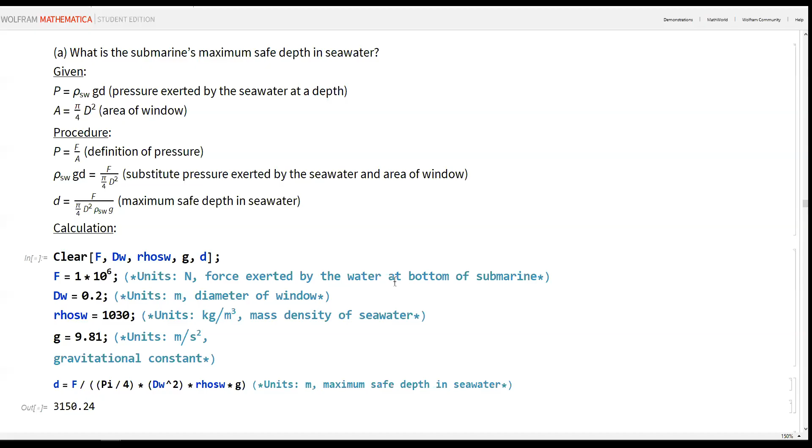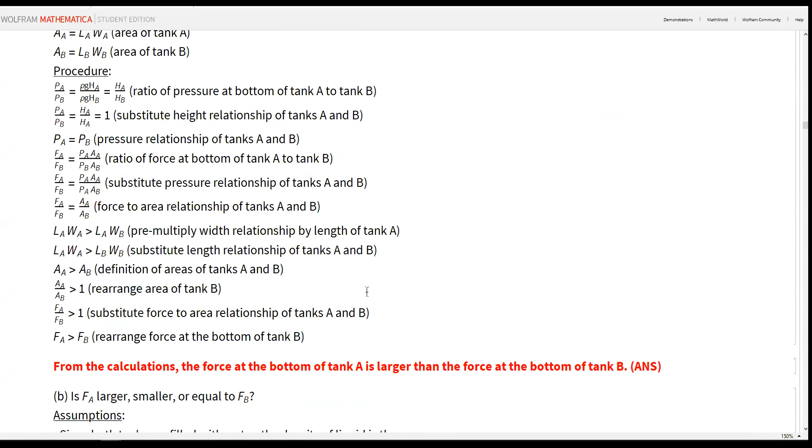Do you want me to, do you want to share your screen? For which one? I think some of those, like that problem is not really, she probably made that one up. It's very similar to 1A and B. But she says, I understand it, but where she says M prime equals M, what does that mean? It's another assumption, M prime equals M. For which problem is this?

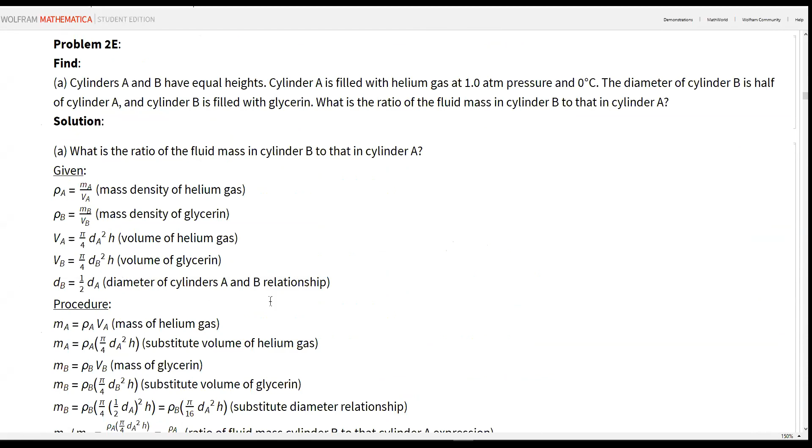For 2A, okay, so for that one, yeah. So she's probably saying that it's the same mass, right? I think that's what she's saying. She says air enclosed in the cylinder has density rho equals 1.4 kilograms per cubic meter. Yeah, so the rho is given, but she's saying that the length of the cylinder is doubled.

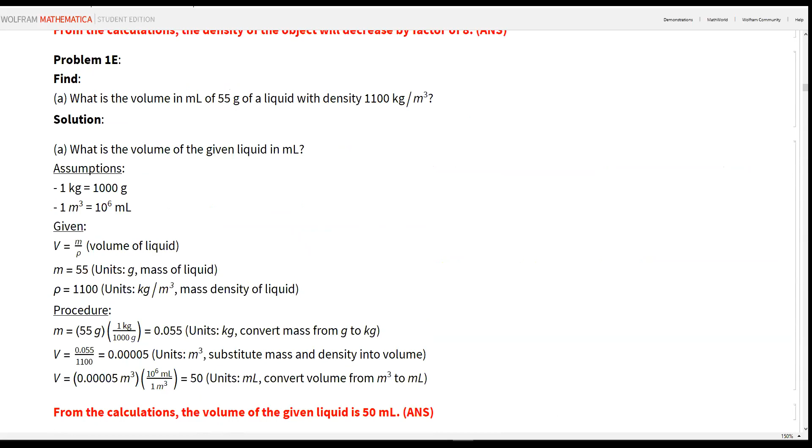Okay, actually, can I see that one? Like, it's honestly not in this problem set. Oh, okay. Yeah, let me see what that says. Sure, okay. You can probably fill in the steps.

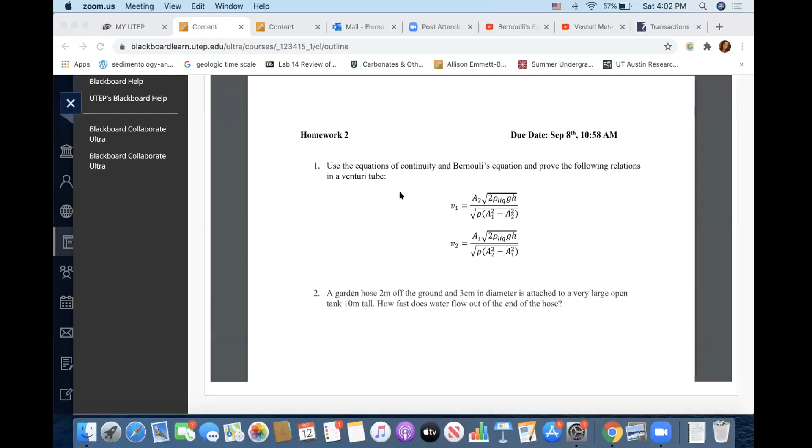Okay, why does it do that? Let me read part 2A.

So what will be the density of the air if the length of the cylinder is doubled, while the radius is unchanged? So if the length is doubled, you're just timesing the volume by 2.

Yeah, that makes sense. The mass, M prime — so the rho, what does it say about the length of the cylinder? She's saying that M prime is the same as M. And then since the length changes, the volume is timesed by 2, which makes sense, yeah?

Does that make sense that the volume is times by 2? But the M is the same for both? Like the mass is the same? Yeah, rho, the density of the air — length of the cylinder is doubled. What will be the density of the air if the length of the cylinder is doubled while the radius is unchanged? Because it's both air.

It's just the cylinder that's changing. The mass is the same because mass is associated with the material, really. So it's air — the mass is the same, but then the V is not the same. So the mass is gonna cancel out, and the V, but then you have this 1/2 left.

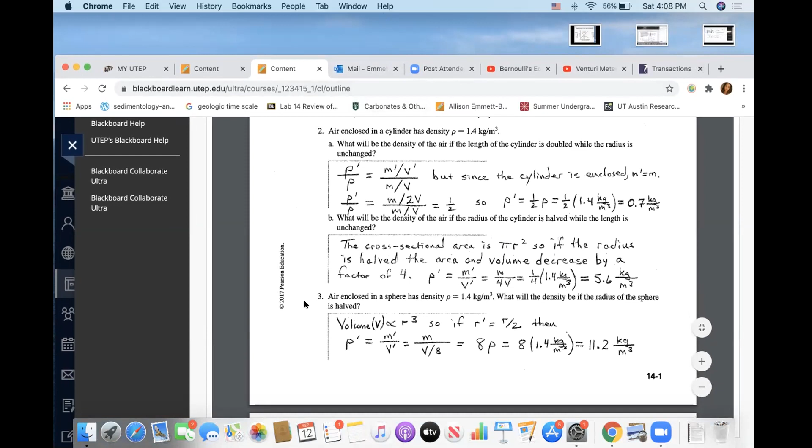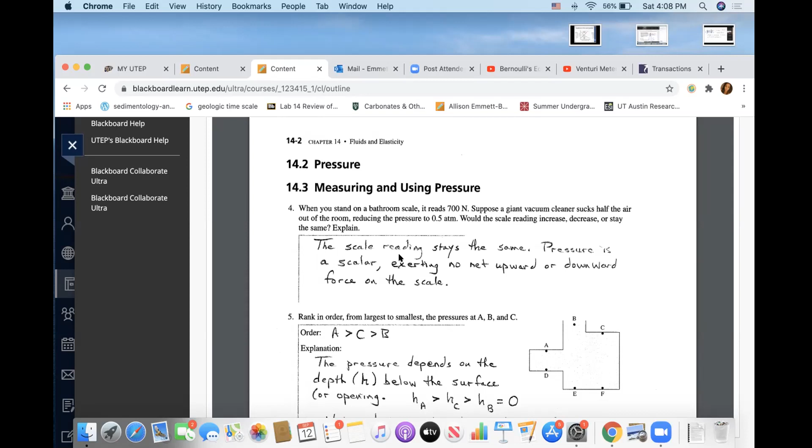Yeah, I figured with Chegg and having a tutor for the homework problems I'd be fine. Yeah, you'll be good. But what I'm referring to are the P problems — I think it's after 37, 38 up to like 75. If you're bored as hell, just do those.